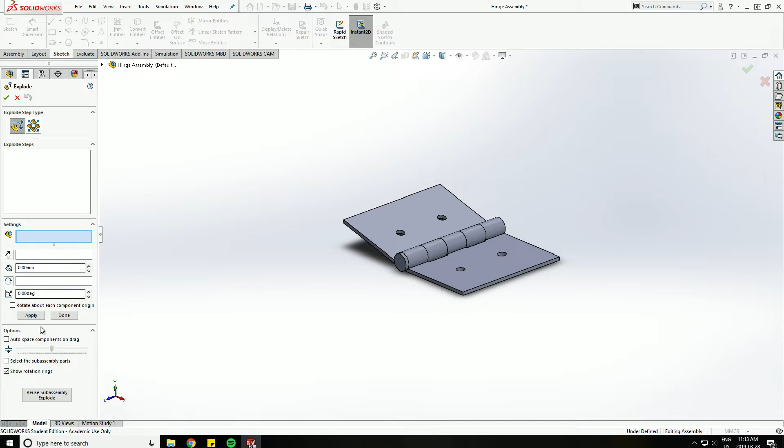Right click on default and click new exploded view. And then right away we'll be popped up with this explode dialog box. So what we need to do is pick the components and then move them away from their current position. So when you're in the exploded view, none of the mates are active, they're all suppressed. So we can move the components like that.

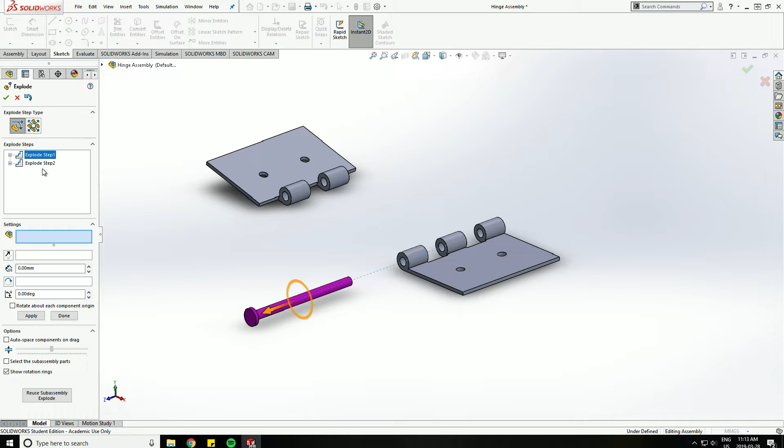You'll see here I have these explode steps, which shows hinge pin, hinge B, right? So I move those two components and then I'm going to press OK. Then I can left click on default, find the exploded view that we just created, right click on this guy and click Smart Explode Lines.

And then what that's going to do is draw lines for where the components were and where they are now. So we can see that the hinge pin was on the inside of the hinge and this half of the hinge was here and it's been moved.

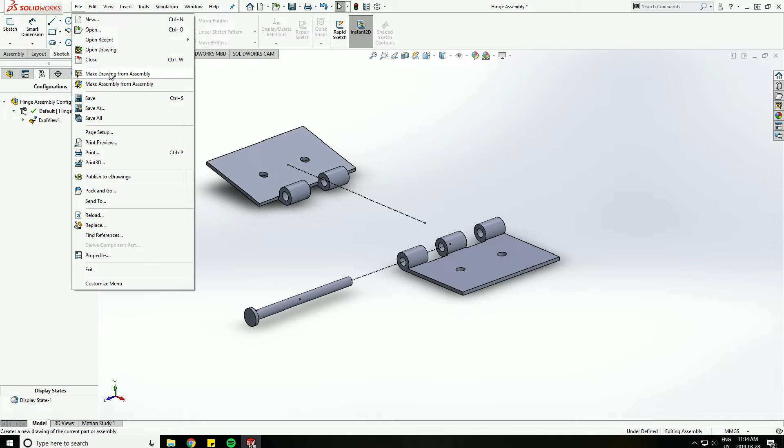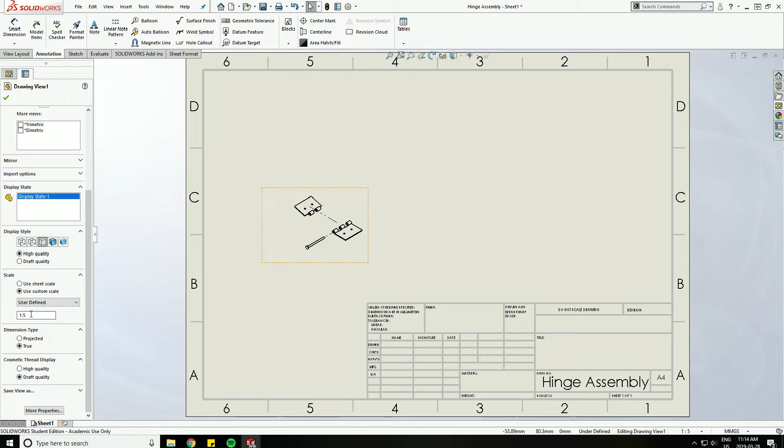From here we're going to go ahead and click File, Make Drawing from Assembly, find our A4 ANSI landscape, and then under the view palette where we would normally have the front, back, and all the other views, we can see isometric exploded. So if I drag isometric, we can see here, let me just change the sheet scale, so we'll do 1 to 5.

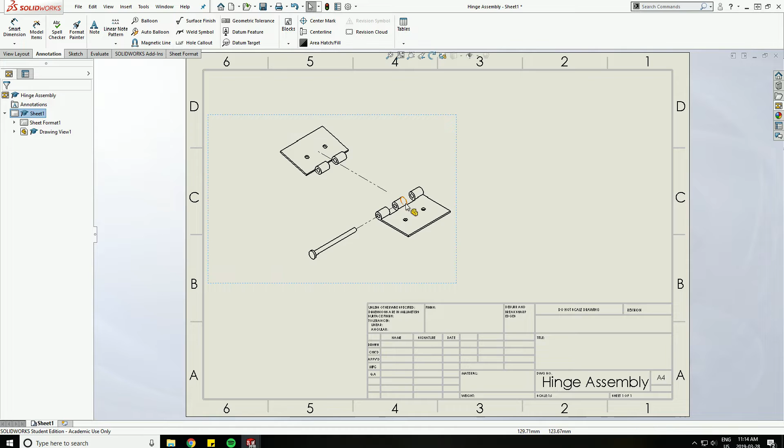We can see here I have the exact view or the isometric view of that exploded view that I did in modeling. So here we can see again we have the hinge pin, which has been separated from the hinge, and you can see the exploded line, and then hinge B, which has been separated from hinge A using this exploded line. So it's pretty evident how exactly this assembly is put together just by using this exploded view.

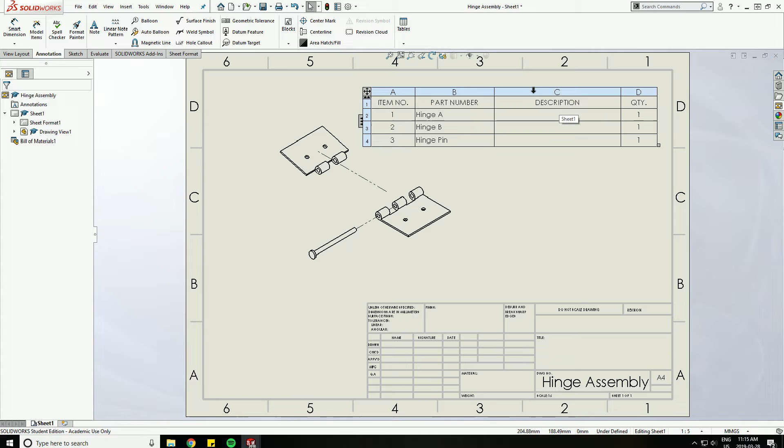The next step we can take, if we click Insert at the top of SolidWorks, then Table and Bill of Materials, it's going to ask us to select a view, so we want to pick that exploded view, so we can just select the dashed line on the outside of the bounding box. It's going to give us a whole bunch of options here, just press OK, and then we'll see we have our bill of materials. Now the description column isn't really necessary, you can just go ahead and delete that, and then drag your bill of materials to a suitable location on your sheet.

The last and final thing that we'll want to do is balloon these items so that we can reference their name and item number to the bill of materials. So we can click auto balloon or balloon. Auto balloon will do it all automatically. I find that's the easier way to go about it.

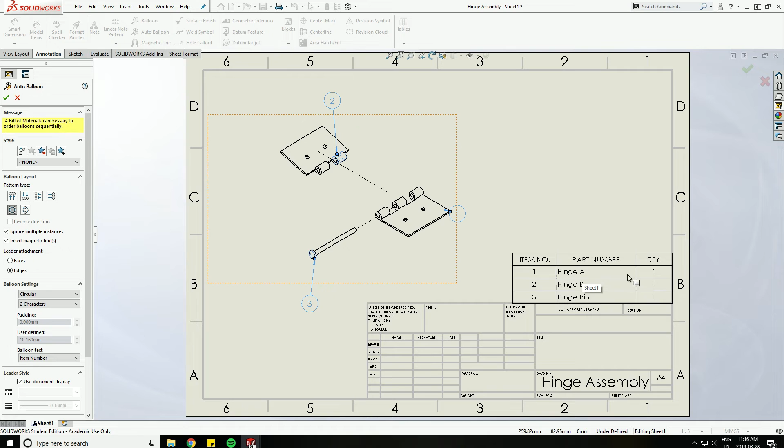So we'll just go ahead and click auto balloon, and you'll see here it automatically picks the parts and labels them with the item number here in the bill of materials. Just go ahead and press OK, and then you can move these balloons to a suitable location. So I'm just going to do something like that, and then we can see hinge A, item 1, right there, hinge B, item 2, right there, hinge pin, item 3, right there.

If we had duplicate items, the auto balloon will balloon only one of those items. So if I had 3 hinge pins, say here, here, and here, it will only balloon one of them, but the bill of materials will be updated and it'll show item 3, hinge pin, quantity 3. So if you had 2 of these hinges or whatever, it'll show up here under the quantity, but the balloon will only point to one of them.

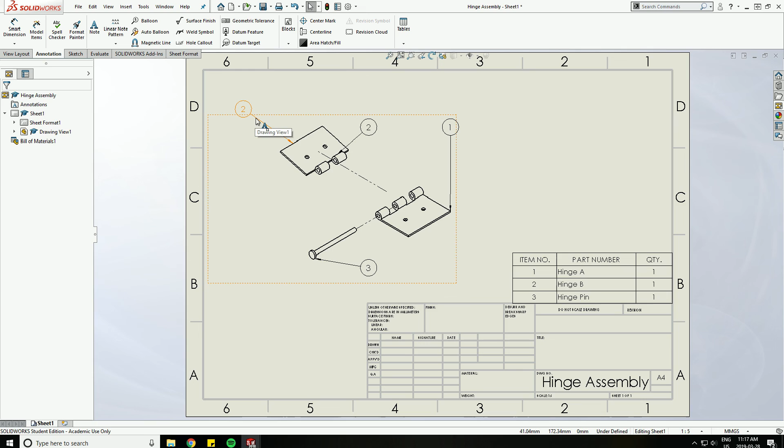So you can of course go ahead and add a manual balloon like this, which will also show the item number if you'd like to add that in. Once you're done with this, just go ahead and save and submit your work.